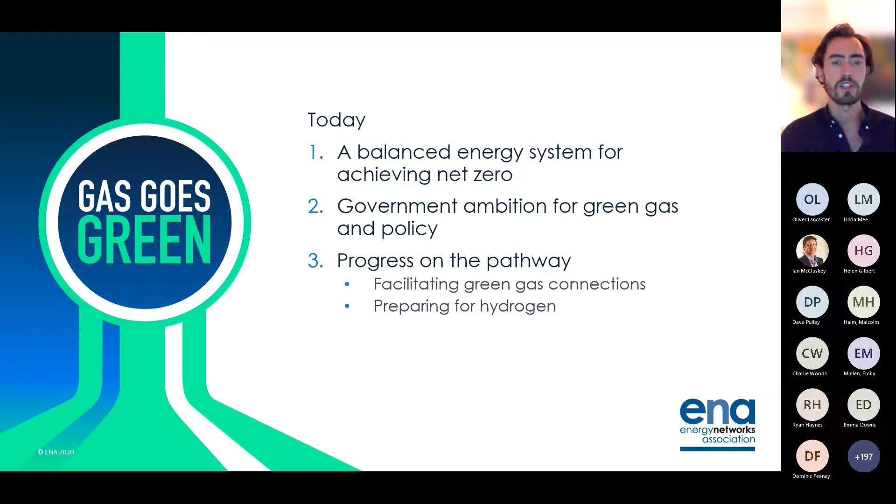So if we go on to the next slide, and the next one again. This illustrative chart shows how our ambition as gas network companies - and I refer to ENA's members Cadent, National Grid, Northern Gas Networks, Wales and West Utilities, and SGN, and independent gas transporters - really requires a fundamental change in the composition of the gas that's transported and distributed through the networks.

It's going to require a change from the natural gas received today to an increase in biomethane and hydrogen. Ollie actually used the word balanced a couple of times in his introduction, and certainly that's our view of what's required. The modelling that underpins our vision is what we term a balanced energy system model. It's balanced because it requires a number of different energy sources to achieve net zero across buildings, industry, power and transport sectors, and doing this at lowest total system cost.

Our view of a balanced approach has a considerable role for low carbon and renewable gases, used in balanced combination with low carbon electricity, with CCUS, with substantial energy efficiency measures being introduced. As you can see from the profile of the chart and where we are in terms of the time horizon, there is a lot of progress still to be made.

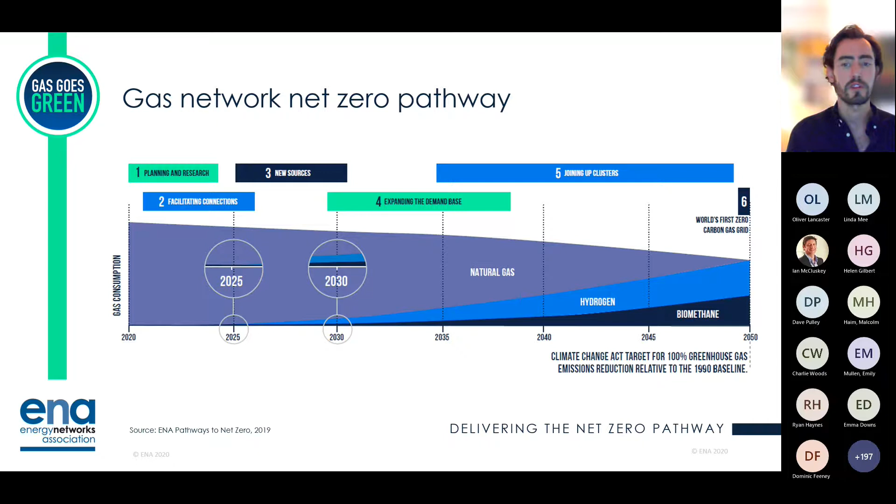If we move on to the next slide, and the next slide. So it's against that background of potential pathways for the energy transition that over the last year we've received a number of government strategies and position papers, and these will provide the foundations on which we'll build this transformative agenda. So I wanted to highlight a couple of key updates.

As Ollie mentioned, a year ago the Prime Minister released the 10-point plan. In this, government committed to realising 5 gigawatts of low carbon hydrogen production by 2030, and for 1 gigawatt of this capacity to be online by 2025.

Responding to network plans, government also put forward its hydrogen in homes strategy, and this could be seen as having two parts. One in relation to a hydrogen blend, to complete the testing necessary to introduce a hydrogen blend of up to 20% volume by 2023 into the gas distribution grid.

And a second part of this hydrogen in homes strategy to begin a really comprehensive and world-leading trials programme of 100% hydrogen being received and used by households. So the first element of this is to have a 100% neighbourhood trial up and running by 2023.

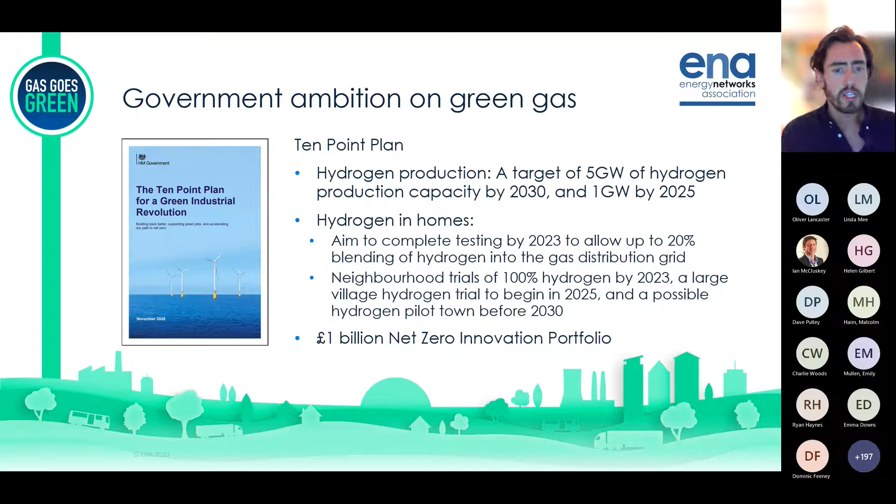On the next slide, if we can move on, we have had more recently the UK's hydrogen strategy. And I think overall, reflecting on that, there was much in it that was worth the wait. I think all parts of the energy industry now can have confidence that hydrogen will be a part of the future energy mix, at least to some degree.

We have a very clear date by which government wants to make a decision on hydrogen blends, as I mentioned, and a value for money case is underway within BEIS already.

On 100% heating, 100% hydrogen for heating, we know from the strategy that a decision will be made by 2026 on the extent to which hydrogen will be the dominant means of heating homes up and down the country, or whether alternative options will be the dominant means. And as I mentioned, we've got a clear timeline for trials of 100% hydrogen.

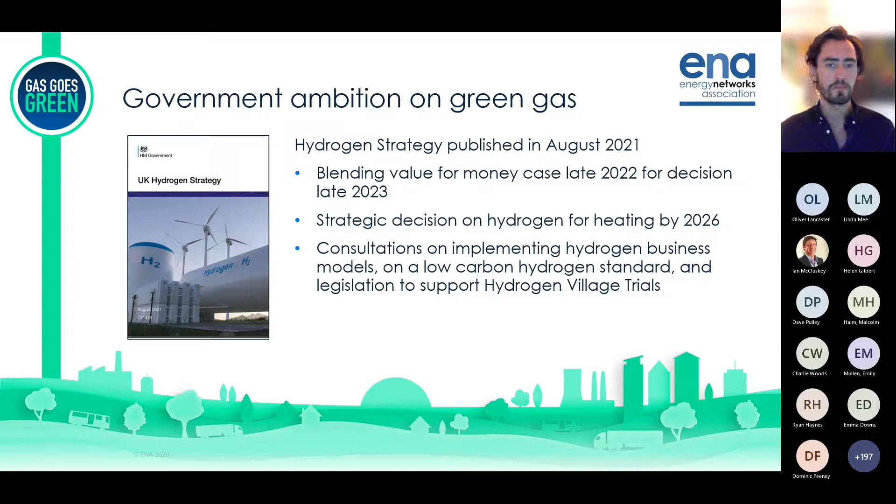So moving on to the next slide. The strategy and policy landscape that I set out, it's really against that I see it appropriate to track the progress that we are making. As I mentioned earlier, our shared pathway has 2 steps that we're working on at the moment, or for the next 5 years or so, and those are to prepare for the transition and to facilitate green gas connections.

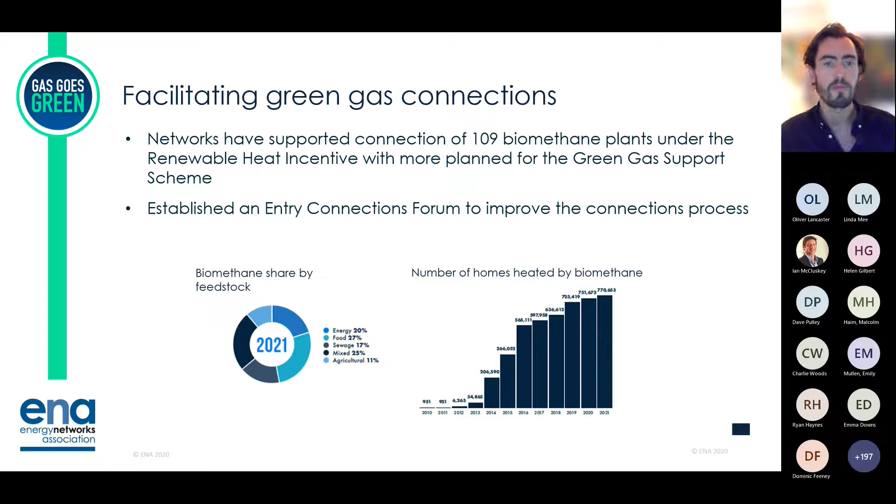And if we move on, the other part of our focus is on preparing. There's a couple of points here that I want to mention before concluding.

At the start of the year, we published our hydrogen network plan. As you can see from the graphic here, this is our plan to support hydrogen right across the economy, do what's necessary at the networks to enable that economy to grow. Our plan has 4 stages, as you can see on the slide here.

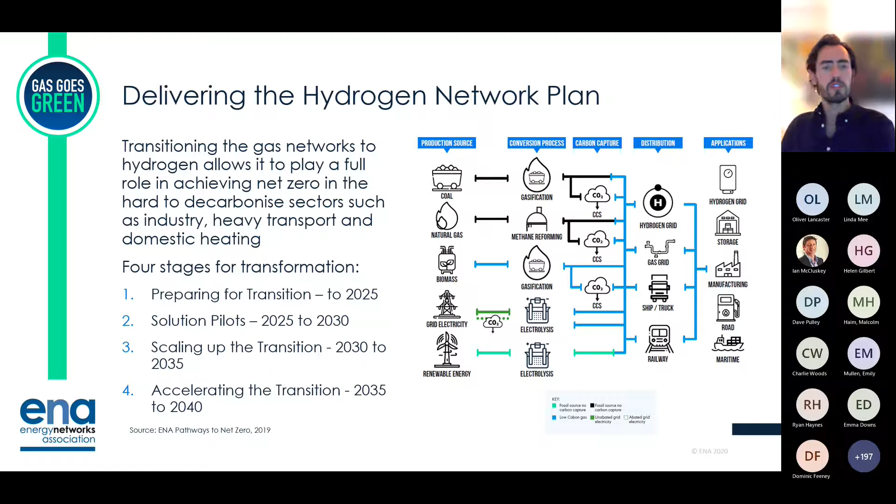Those are to prepare for the transition, to introduce solution pilots, to scale up the transition, and then to accelerate that transition. On the next slide, I'll say a little bit more about how this develops. So in the first stage, moving from left to right, really over the next 5 years, the networks will be undergoing this preparation and strategic development.

The networks will be continuing with the Iron Mains risk reduction programme to replace old pipes in the ground today with new polyethylene pipes, these being ready for hydrogen. We know that the networks will need to complete the safety case for hydrogen and undergo that programme of trialling hydrogen in homes. It's from this first stage of work that the government will have the information required to make the policy decisions it needs to on the conversion of the networks and on that long-term role of gas in UK energy.

In the second stage, from around 2025 to 2030, the networks will be carrying out these important pilots. The blends of hydrogen into the network of up to 20% volume will roll out right across the network. Also at this time, the current billing regime will have to change so that energy is billed on the basis of energy content rather than on volume.

Then in the early 2030s, this scale up that I mentioned will commence. Hydrogen pipelines that have been built to facilitate industrial clusters will begin to join up with one another, and the Iron Mains replacement programme will conclude.

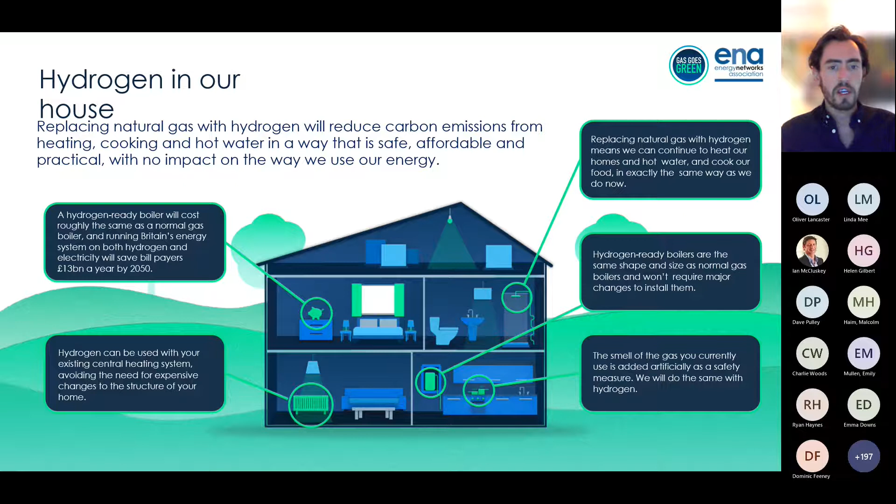On the next slide, I wanted to set out that the transformation I've just described is one where the networks or parts of them convert to 100% hydrogen. But as mentioned, considerable work has taken place and work is underway to introduce a blend of hydrogen into the network. This might actually prove to be the first experience of many up and down the country of receiving hydrogen and understanding what hydrogen is as an energy source.

Network projects, including HyDeploy, which many of you will have heard of, have trialed and tested blends of up to 20% hydrogen volume. Work that we should release next week will set out possible timelines of legislative and regulatory changes that might allow hydrogen blending to meet the government's 2023 deadline.

We're currently working on 2 or 3 different approaches: whether to follow a blending regime that seems very similar to how biomethane is today, or whether a more strategic key locations approach could be taken to introduce higher volumes of hydrogen in certain places, with the networks managing where those blends go. We need to do more thinking on these and test them with people, drawing in lots of views.

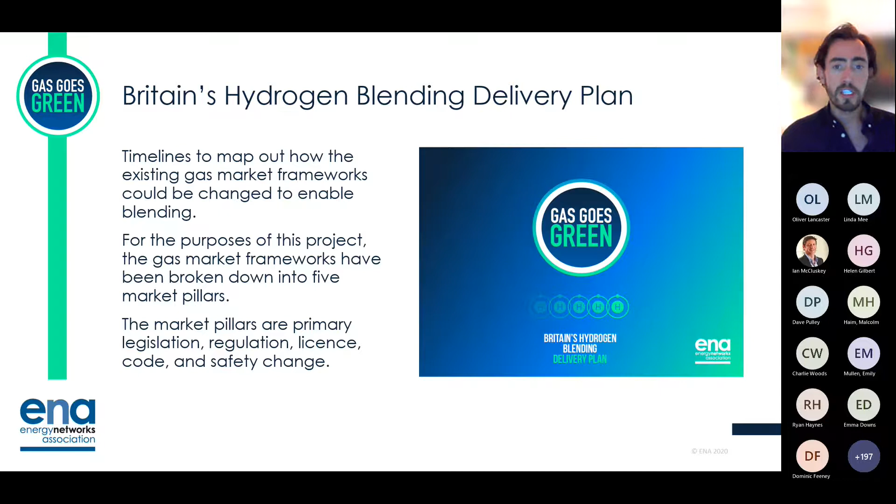So my final slide is just to say that Gas Goes Green is united in our roadmap to 2050, to net zero. But of course, it's the gas network projects that really sit underneath and underpin the gas networks' shared Gas Goes Green programme.

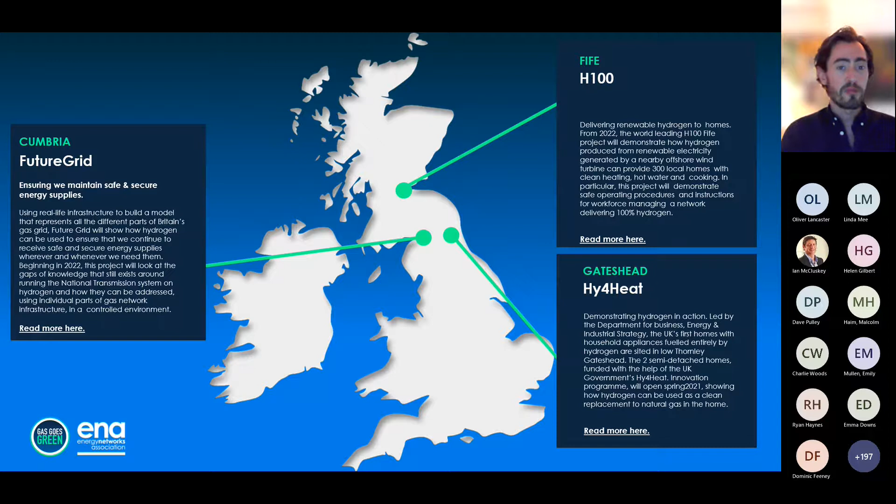I won't mention each of these projects as I'm conscious of time, and there are indeed many more projects listed on the next slide in addition to these, but I wanted to share these to give a flavour of the sort of work taking place, the engineering learning that's providing the basis for the strategic view set out in Gas Goes Green.

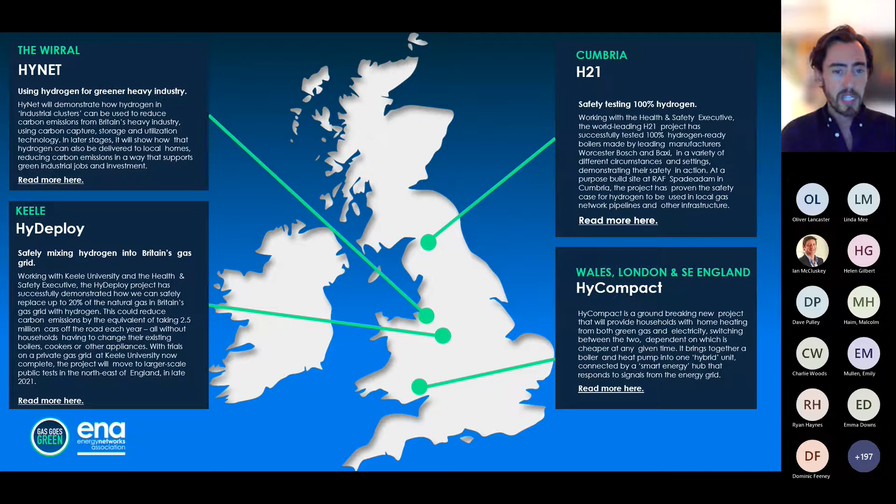So that's my update on the progress we're making to date on building a net zero network. Hope that's been of interest, and I look forward to questions.

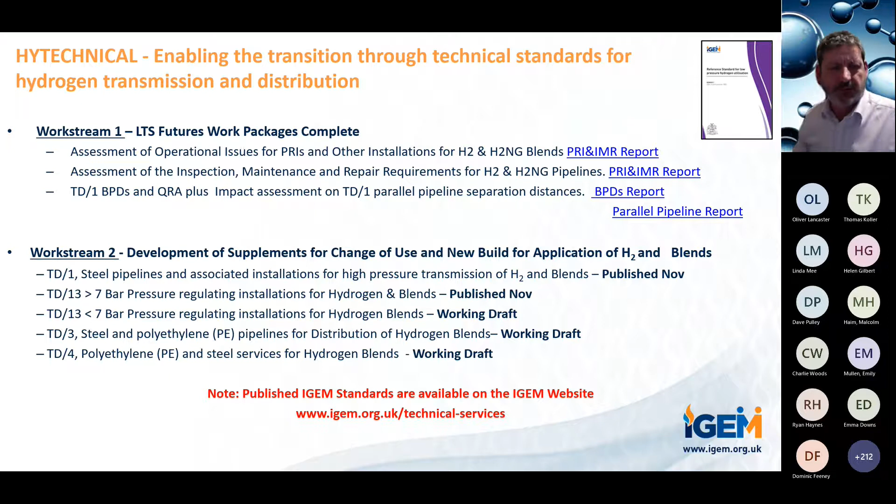The next 2 work streams was looking at hazardous area assessments. SR25, for those familiar with it, is an existing assessment for hazardous areas for gas installations. We're close to publishing a new supplement to that. There's been a report, phases of it. Phase 1 was just a report looking at the suitability of these approaches, not just within IGEM, but other standards that are used, but also looking at producing a new supplement. There's incredible work being done by the Health and Safety Executive and DNV producing these reports, and there's a supplement about to be made available for industry comment.

We also did some work on SR23, producing a report through DNV looking at the review of thermal radiation and noise for hydrogen venting. That report has been published and is available on the IGEM website on the Hydrogen Knowledge Centre.

Now, turning to the downstream activity, here IGEM is developing new standards that will be providing the technical requirements for engineers to be trained to facilitate the occupied trials for hydrogen, which Tom mentioned is going to be happening in Fife. IGEM set up a small working group with technical expertise to lead the development of these technical standards, and we'll work with Energy and Utility Skills, a key partner in the provision of the essential training and assessment specifications that will be used to train the engineers for these trials.

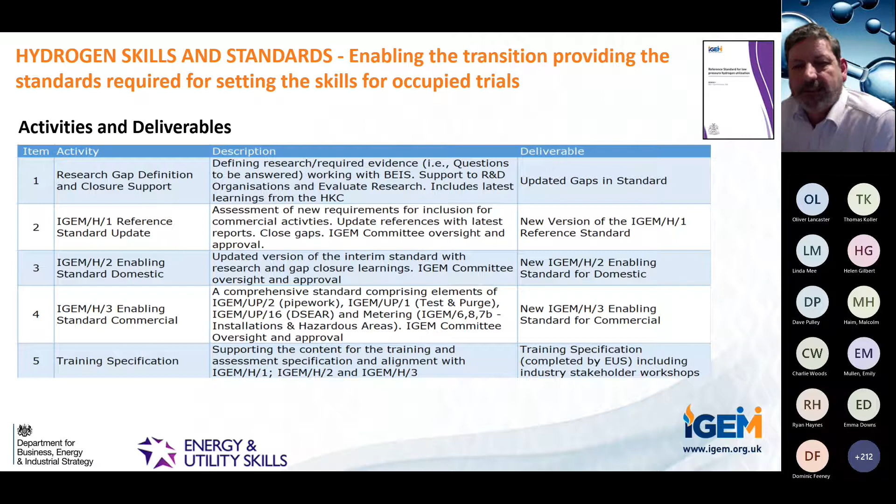I just want to touch on hydrogen quality here. It's a critical standard that we will need, which takes into account a lot of the work, an understanding for a safe distribution of hydrogen in the network, particularly through a lens of either new or even repurposed network as well.

Taking account of the different production techniques, the purity and odorization techniques, looking at the transmission and distribution system including storage, and the effect on applications - what's critical to ensure safe combustion and operation, including transport. Of course critical will be the safety aspects, particularly as it's used by end users.

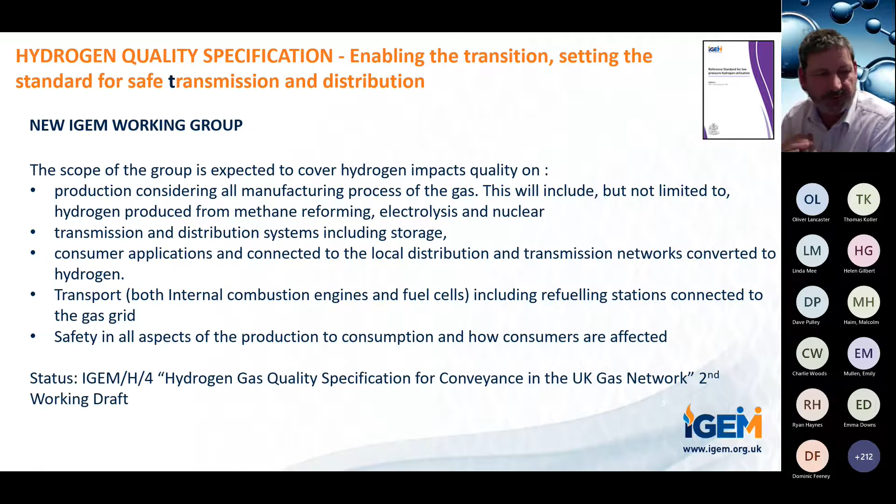We're currently working with a group set up through the Hydrogen Committee. We're at a second working draft of that document, outlining the key parameters for the specification. Next slide, please, Kevin.

Now turning to gas quality wider, a proposed new IGEM gas quality standard, seen as a key step in this pathway to net zero. The gas quality working group was formed to create a standard covering the UK gas quality specification, in support of duty holders required to demonstrate compliance with GSMR, enshrined in Schedule 3 in the UK. The standard has been published against the backdrop of declining supplies in the North Sea, more reliance on imported sources from both LNG and the interconnector. Quite important as well is the need to decarbonise the energy system.

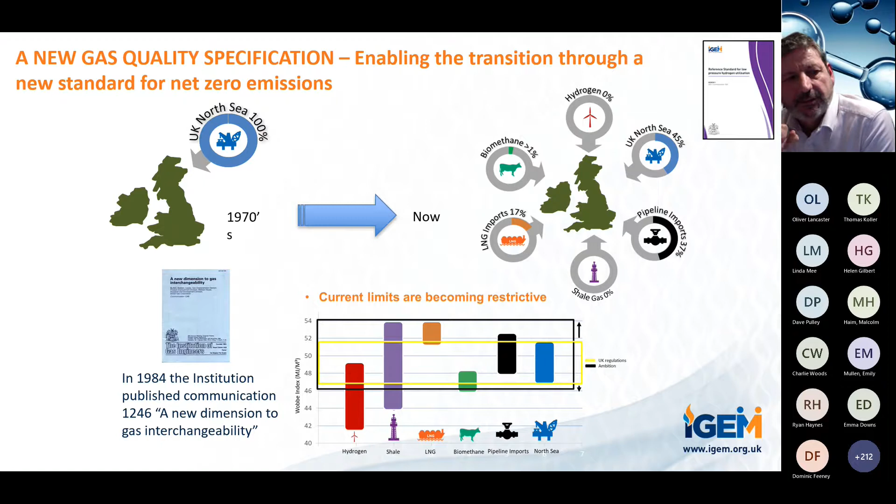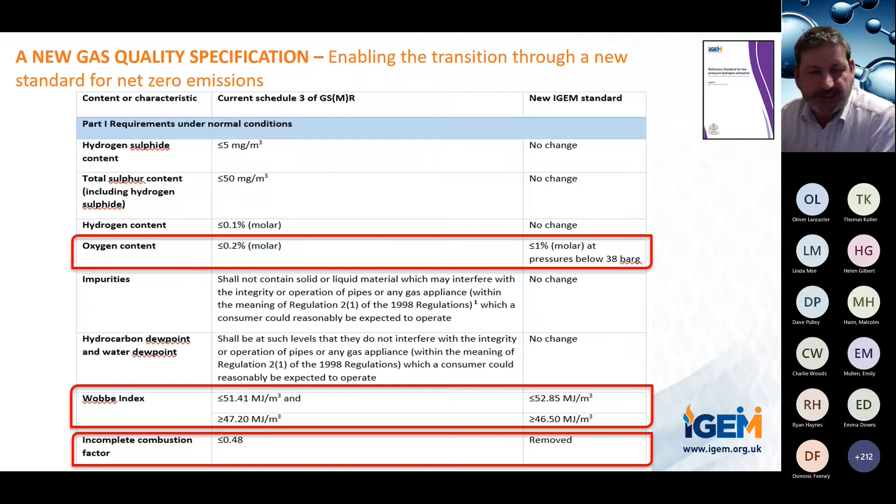So next slide please, Kevin. Just some of the key changes as a reminder of what we've published here: the oxygen content normalised to 1%, currently 0.2 although there's a class exemption. The Wobbe limits are now extended to 52, proposed to 52.85 megajoules per cubic metre, with a new lowering of the bottom end to 46.5, so a wider range of gases. We've removed those interrelated safety factors of the incomplete combustion factor.

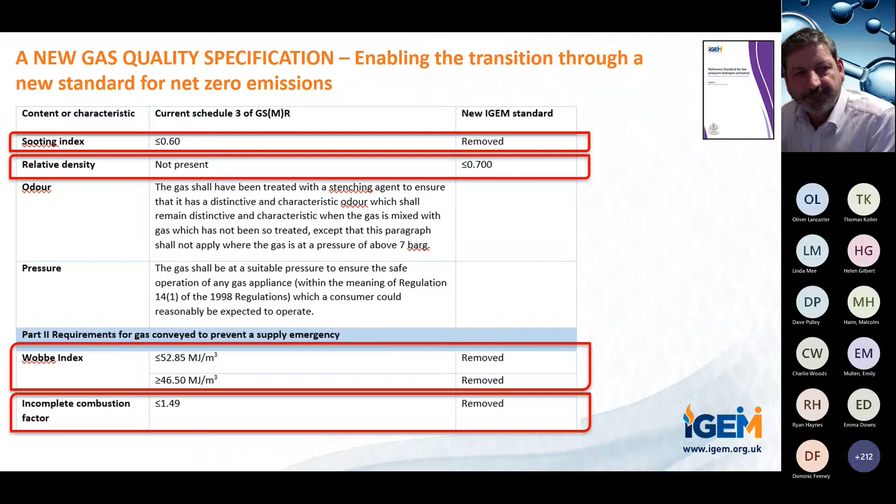And the next slide please, Kevin. The sooting index - we propose a new dimension where the Wobbe index is inferred through relative density as well, 0.7 no greater than. Because we've now used emergency limits as the normal limits, there's no need for another part dealing with Part 2 requirements for emergency arrangements. That's currently in proposal.

Next slide please, Kevin. The Gas Quality Working Group recognises the wide support for incorporation of hydrogen into the new standard, and we discussed that hydrogen is going to play a key and critical role in the decarbonisation moving forward. But at this time the evidence base needs to be fully developed, and once it's fully developed it will then be incorporated into the new standard. So we'll get the standard published. We've now got a dynamic framework for further changes when the case for hydrogen becomes developed.

It's important to remember as well - next slide please. It's important to remember that GSMR, the regulation which will need to be changed following the agreed proposals should they get finalised, was primarily intended to ensure the safety of the public, and it will continue to be the main aim of any new standard we publish. All the evidence, and there's been a huge amount published, has been submitted to the Health and Safety Executive. They've been assessing that and undertaking an impact assessment as well. All the work we've done is available on the IGEM website.

I understand next week I'm going to be hearing the result of that impact assessment as well. So fingers crossed, we should be moving forward with the changes and the implementation of the new standard next year. Next slide please, Tom.

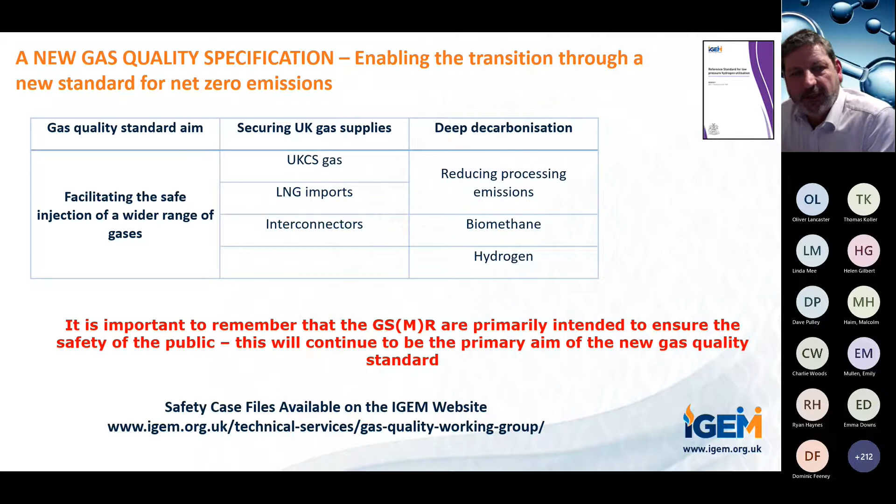Conscious on time here, so I'll rapidly mention the Hydrogen Knowledge Centre. Again, big thanks to Sarah Ellis Manning, who's managed this brilliantly to roll out this new website, created to share knowledge around all the different projects that have come together, not just in the UK but worldwide as well. There's an incredible amount of resources in there. It's been developed through seed funding from the Department for Business, Energy and Industrial Strategy, and we're grateful for their funding and also for the ongoing funding support from the gas networks.

Just some of the dimensions in there as well - it's incredible, since we launched it we've got on average 2,500 visits to the website every month, some over 300, nearly 350 downloads each month. It's got a number of hydrogen resources, over 2,700 in there, and there's some 8,000 esteemed authors as well. If you're interested to connect with IGEM and collaborate on the Hydrogen Knowledge Centre with any of your projects, please do so - contact us on that email address.

Now finally, just looking forward - I'm just conscious again of time. Next slide please, Kevin. We'll do more work on these standards.

We've got another incredible programme developed for next year: 3 new standards for the below 7 bar for hydrogen blends, a new standard for below 7 bar assets, a repurpose standard for below 7 bar assets as well. We'll be bringing up the SR25 hazardous area assessment. It's a huge detailed report, some 250 pages of it, and a new proposal we're working on to develop the SR23 and SR29, which deals with emergency response.